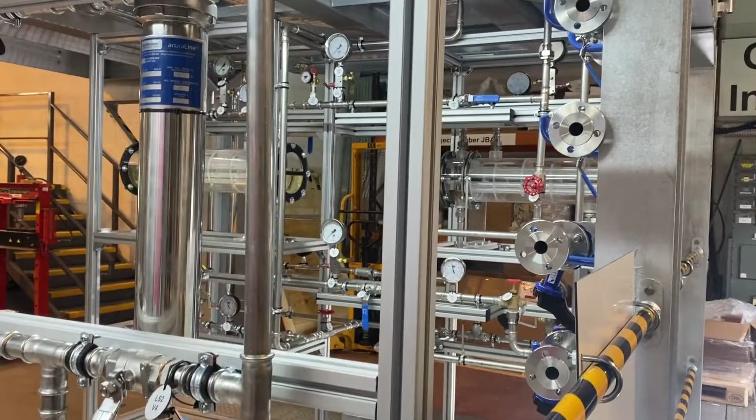Whilst there is a place for simulation and virtual reality in training, nothing will replace the ability to work on a real-life process plant. The ever-increasing demands placed on industry associated with production pressures and health and safety legislation can be inhibitive for hands-on learning.

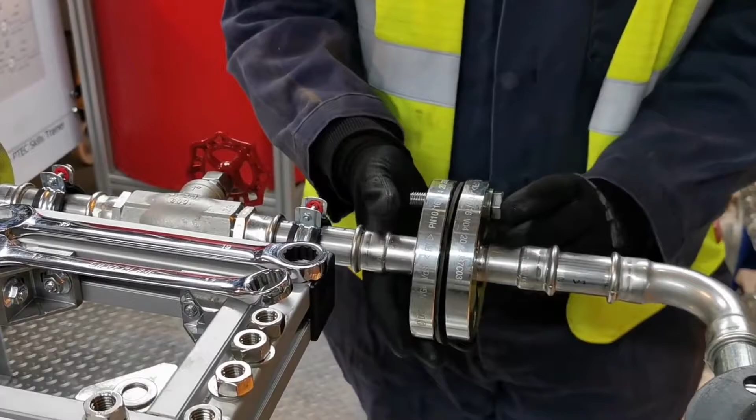DarbyTech products are a substantial stepping stone on the route to competence. They provide an ideal environment for hands-on learning experience.

The Hands-on Process Operator Skills Trainer has been designed to increase the value of process technology graduates to the manufacturing industry by safely demonstrating hands-on operator skills with proper protective equipment, hand tools, standard operating procedures, and standard operating instructions.

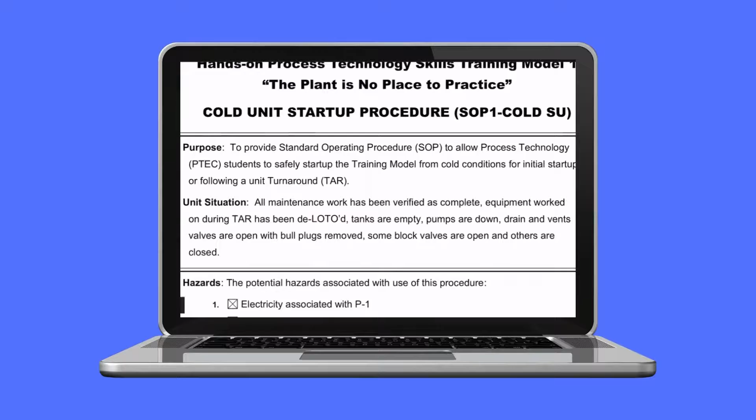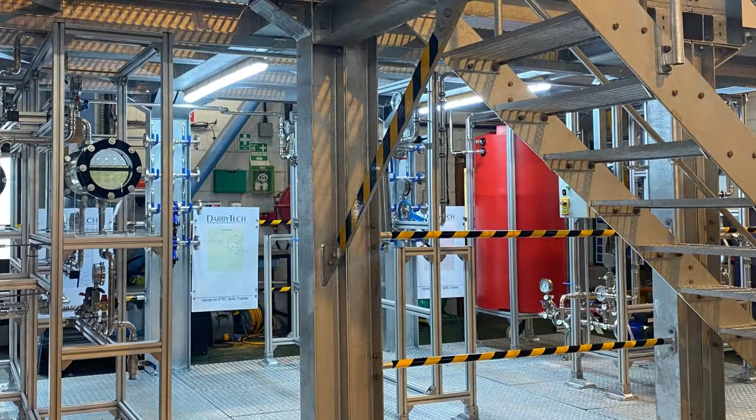The trainer includes tanks, pumps, filters, exchangers, gauges, 10 different types of valves, various types of piping, flanges, gaskets, blinds and orifice plates, and utility hose hookups to allow process technology students to demonstrate a variety of operator-related hands-on activities.

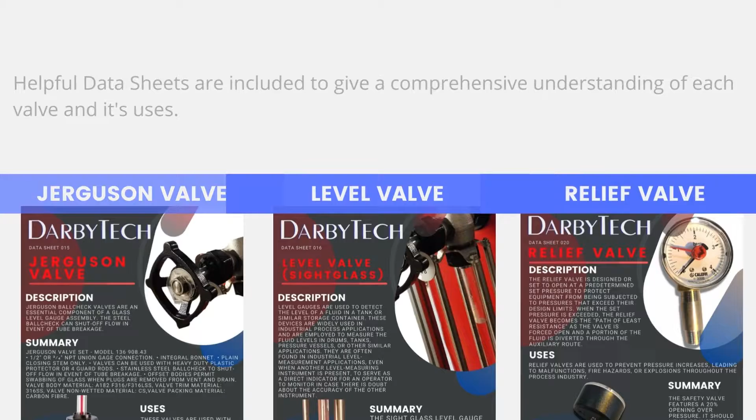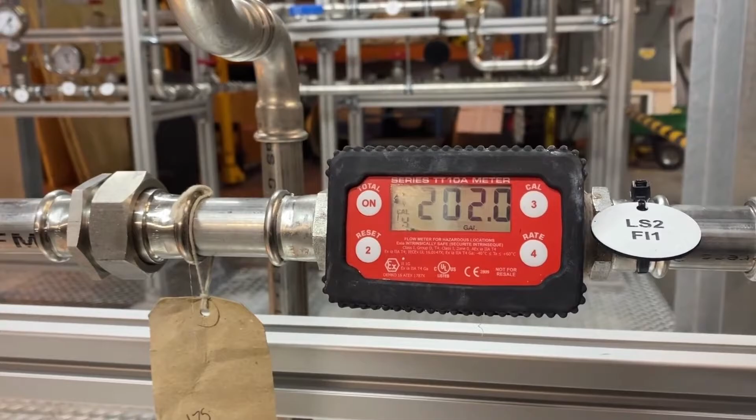The system is designed to circulate water throughout the various equipment in a closed loop, using hand-controlled valves to maintain normal tank levels. Our Operator Skills Trainer utilizes different types of valves and piping configurations with some transparent sections to allow students to verify flows throughout the system.

The Operator Skills Trainer consists of the following hands-on learning stations.

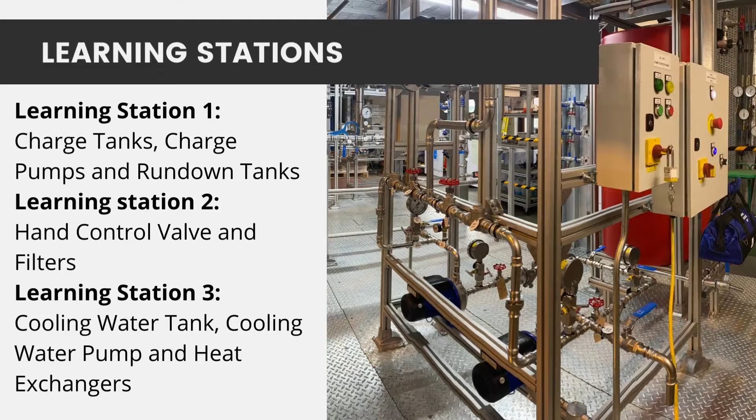Note: Learning Stations 4 and 5 can be operated wet or dry and are mounted on mobile skids to allow them to be easily disconnected from the base station and moved to classrooms or other areas for hands-on skills demonstrations by students and instructors.